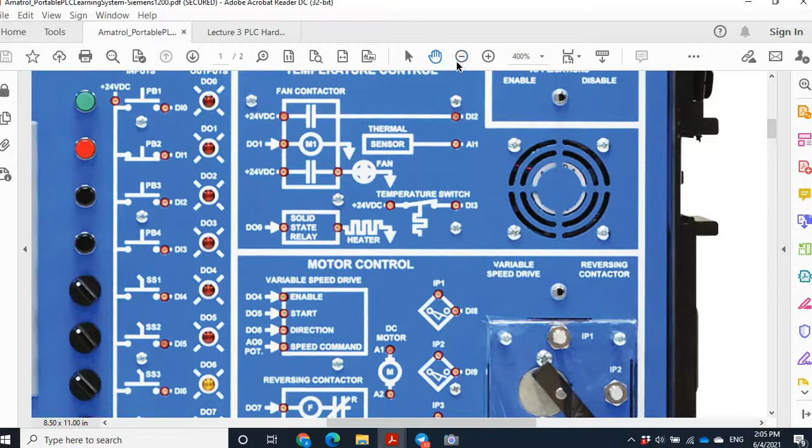Let me remind you that the trainer you have is this trainer. Let me zoom out. This is your trainer. In this trainer, you have a PLC and HMI. The PLC and HMI that you have are similar to the PLC and HMI that we have here. Let me show that to you. The same PLC and the same HMI that you have. Maybe the version is a little bit different, but the same structure.

But in your trainer, you also have some processes: a heating system, DC motor and step motor system. I don't have these. Instead, in my trainer, I have all the input and output terminals of the PLC here, and then I can wire them to the devices. So in your trainer again, let me zoom in.

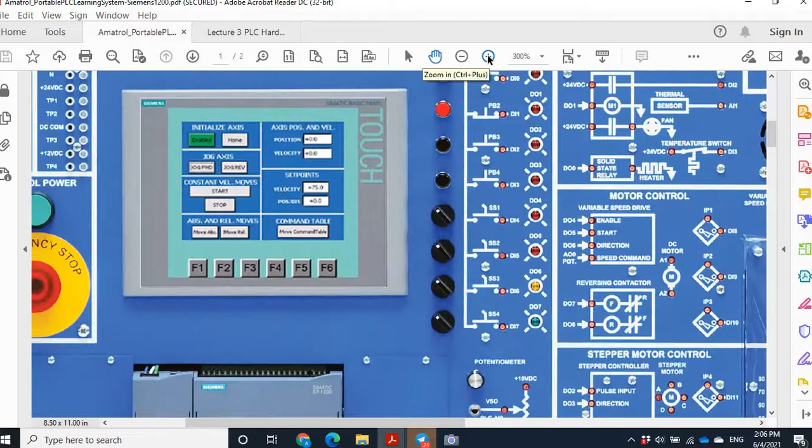Here you can see that you have the inputs, some switches, some push buttons and some toggle switches or selector switches that are connected to the inputs, and this is the wiring of that. You don't need to do wiring. And the outputs are connected to some pilot lights, red pilot lights or yellow and green pilot lights.

But in my trainer, I just have the terminals here that are wired to the PLC. This is the digital input, this is the digital output, this is for the analog inputs. And I need to wire them to the push buttons. Here I have two push buttons, green and red. I use these two similar to your push buttons, the green and red one. And also some pilot lights that I need to wire.

Also in your trainer, in this example, you're going to use the heater. Digital output number 0 is connected to the heater, so when you energize digital output number 0, when its state is 1, the heater turns on. I don't have a heater, but instead I use an electric motor.

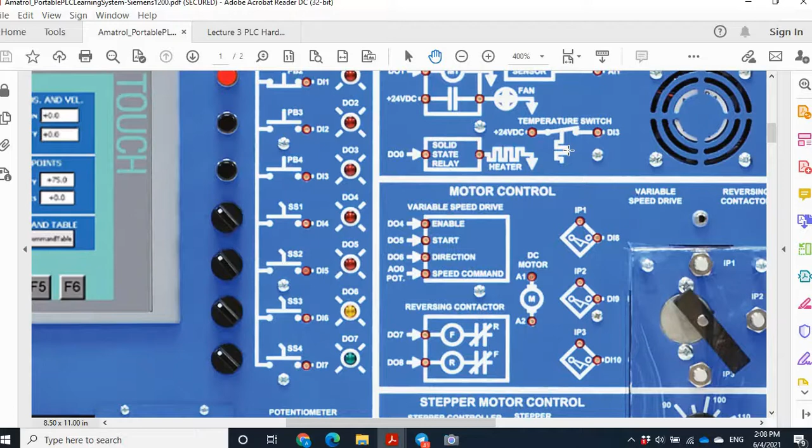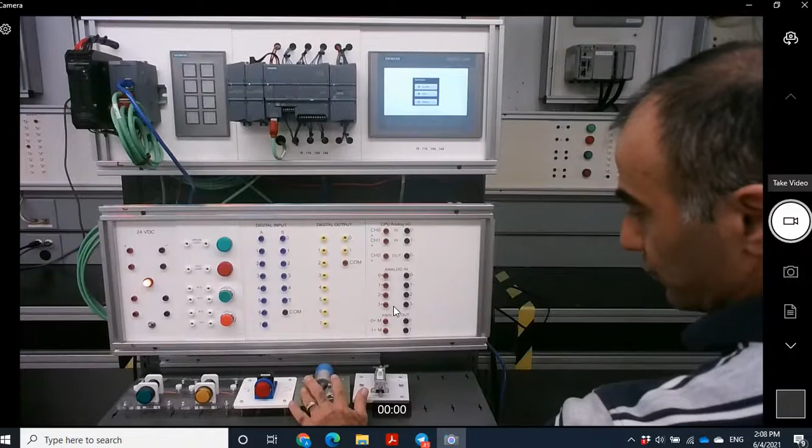You also have a temperature switch that can sense whether the temperature is more than some threshold value. This is the overheat sensor in our program. Since I don't have the heater, I use an electric motor, and instead of the overheat temperature sensor, I use just a switch. By turning it on and off, it simulates the overheat switch.

You don't need to do any wiring in your trainer, but since the wiring and the relation between the hardware and the software is an important concept in PLC programming and PLC control systems, I do the wiring in front of the camera to show you how the devices connect to the PLC here in this recorded session.

Okay, so let's first start with the program. We are going to build a program. So let's open TIA, the Totally Integrated Automation program. I have TIA on my laptop, so I just simply open it as an administrator. Depending on how TIA is installed on your computer, maybe you need to do some initial steps, or maybe it is the same. That's something you should check with your IT specialist. So let's run it as administrator.

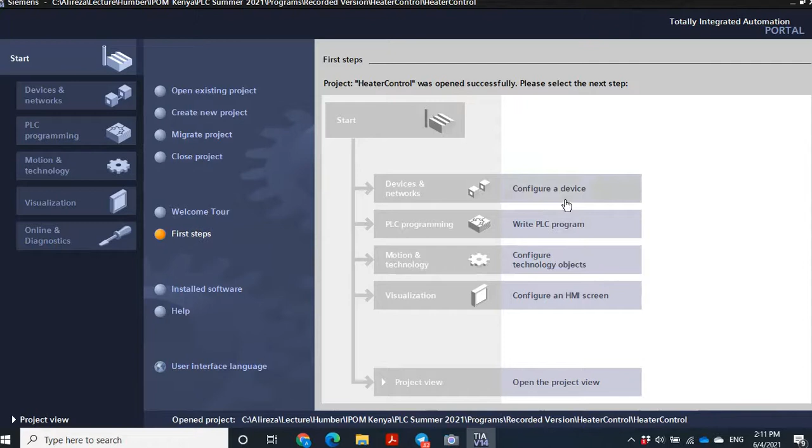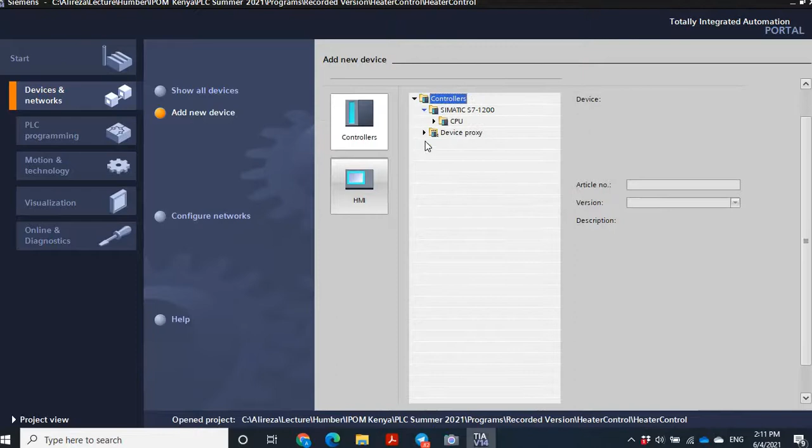Then first select the proper device. By selecting the proper device, I mean the PLC or the HMI. In this example, just the PLC. In the next example, we also add the HMI. So click on this configure a device, and then add new. Okay, controller and HMI. Select the controller under this menu, Simatic S7, and then open the CPU.

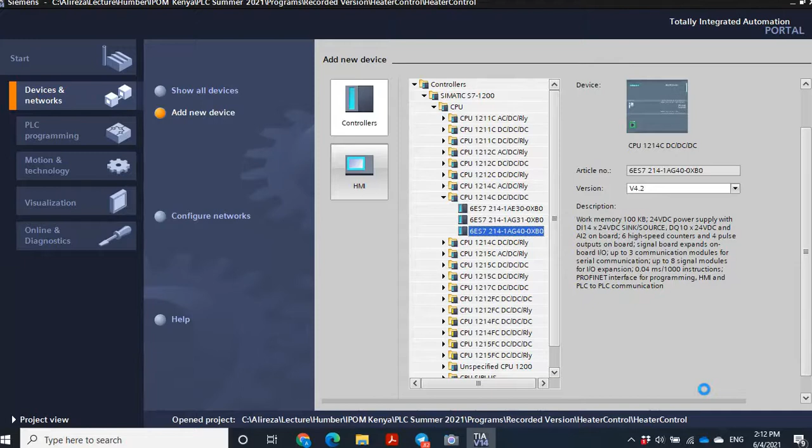The CPU that we have is this one. This type is the one that we have, and it is the same as the PLC that you have in your trainer. Okay, when you select that, leave these as default, and then add. Okay, this adds a PLC with this type to your program, but you should define that this PLC is the PLC that we have in the trainer.

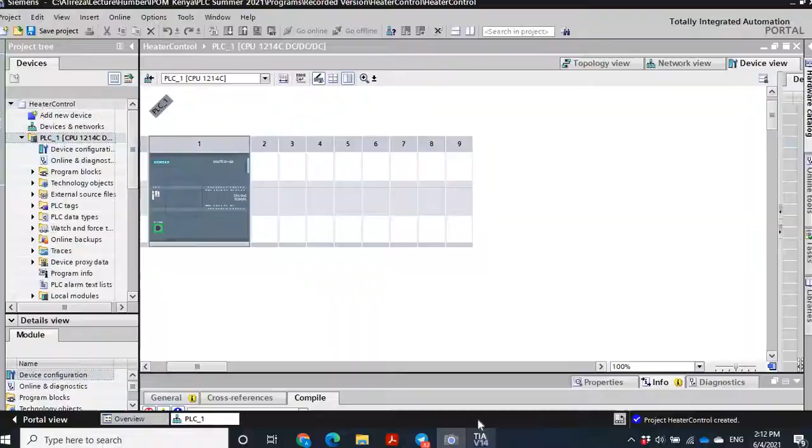So although in the software, the program, you select this type of PLC, you should say that, okay, this is the exact PLC that I'm going to connect with, because maybe there is more than one PLC here. So it's important that you define that. To do that, there are two options. One option, the simple option, is to double click on this one.

Okay, so let me double click on this one, and then drag this up. Okay, here you can see all the properties of this PLC regarding the connection, network connection, regarding the I/O and like that. We need only to set up the IP address for that. So under the General tab, find the PROFINET interface. Okay, this PROFINET interface, and under that, Ethernet address.

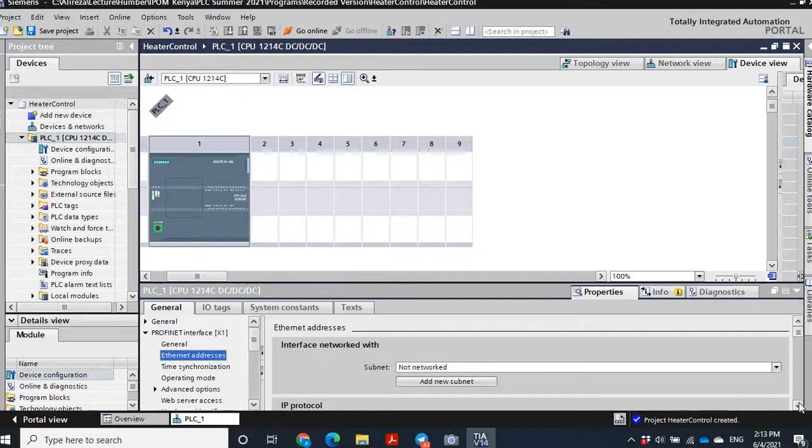And in the Ethernet address, if you go down here, you can see the IP address. There is a default IP address that is given to the PLC by the software. You can change that. The IP address for your PLC is 192.168.0.207. So let's define the same IP address in this PLC too. So this is the address for the PLC.

But if you're going to connect the PLC or any other devices to the computer, all of them should be in the same domain. It means that the first three numbers here should be exactly the same, 192.168.0. And the last one is the device number, and you should assign a different number to each device. For the PLC, the number is 207. For the HMI, we use 205, and for the PC, 200.

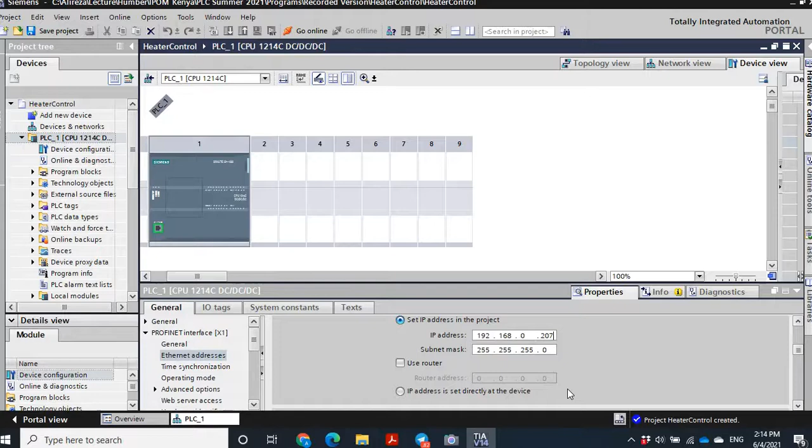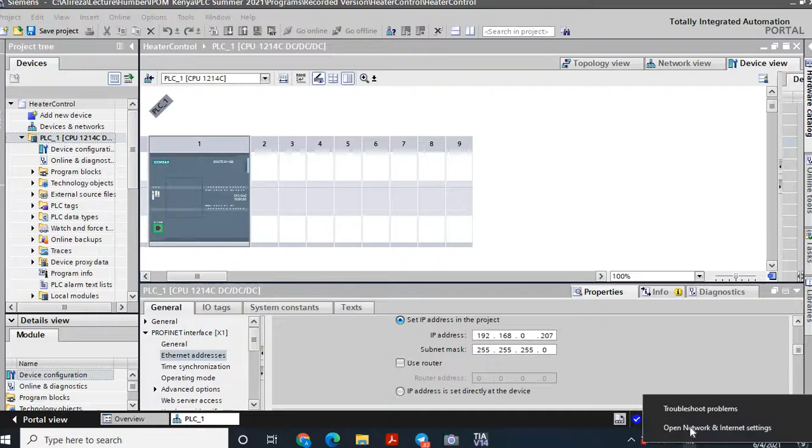So to check whether the IP address of the computer is also in the same domain and correct, you should open the network and sharing settings. So to do that, here, this is for the network. Of course, since I am connected through the wireless, it shows as wireless. Maybe in your computer it is a wired connection. So right click on that and open network and internet settings.

Here this window pops up. Under that, select Ethernet and then change adapter options. Here you see all the network adapters and devices. So the Ethernet is this one. You see Intel Ethernet connection number or something. Also there is Wi-Fi. Maybe you have some VPN or Bluetooth or like that. So this is the one that is the Ethernet.

So double click on the Ethernet. When this window pops up, select Properties and then Internet Protocol TCP/IPv4, the same as we did in the first two sessions. So select this one and then Properties and check whether the IP address is correct or not. If not, you should change it accordingly.

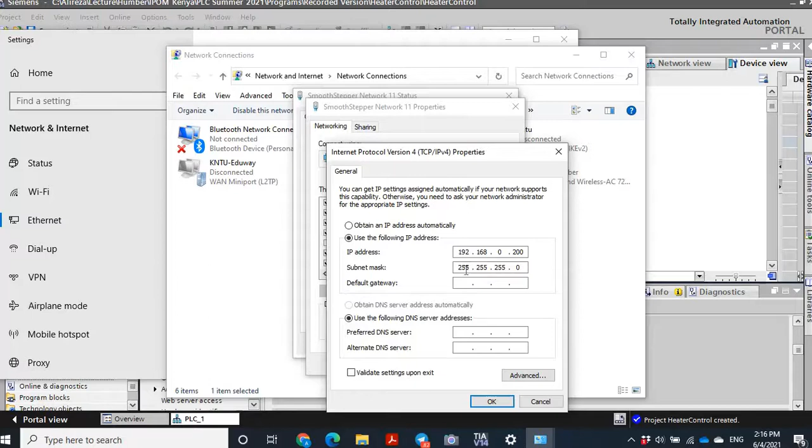So the first three numbers should be 192.168.0, the same as the PLC, and 200 for the PC. And also the subnet should be 255.255.255.0. It is correct, so just OK, and close, and close. Okay, that's correct. So the PLC and the PC are in the same domain. We should connect them. To connect them, you can go online.

There are many options. One of them is to go online, and then the software asks you; or select this accessible device; or you build the program and try to download. In all of these cases, it asks you whether to connect or not. So let me just build the program and then try to download. Over there, it asks us whether to connect to the PLC and finish the setup step for the PLC.

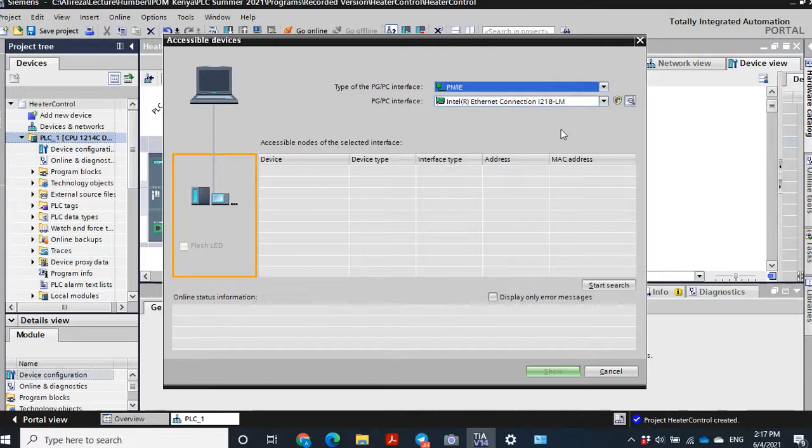So program blocks to build the program, and then on the PLC. This is PLC number 1, the one that we selected. Let me first show you the accessible PLCs once more. So here, click on these accessible PLCs to be sure that this is the PLC that we are going to connect to. Okay, the Profinet, select that. There are some other options. This is Ethernet, and then start search.

So there are 3 devices. These 3 devices in this trainer are the PLC, this HMI, and this HMI. We are not going to use this, just this PLC, and later this one. We don't use this one. So here also you can see there are 3 devices. This is the PLC one that we are going to use, this is the HMI one that we are going to use, and this is the other device that we are not going to use at all.

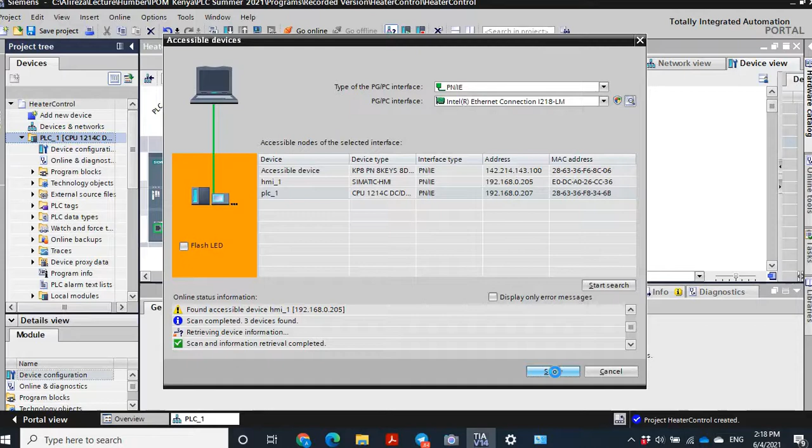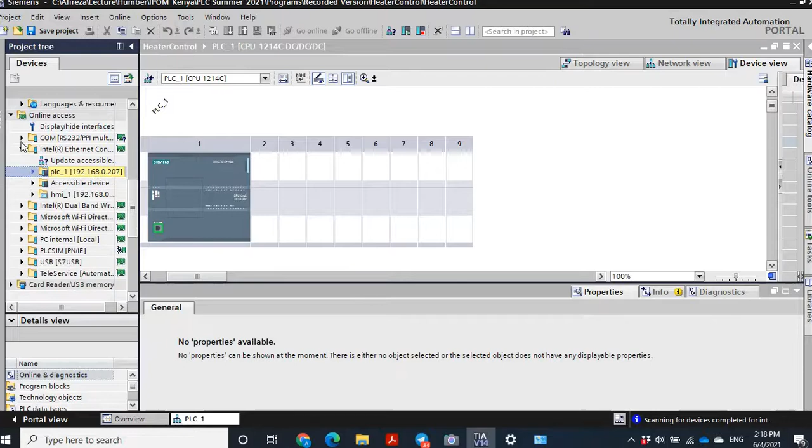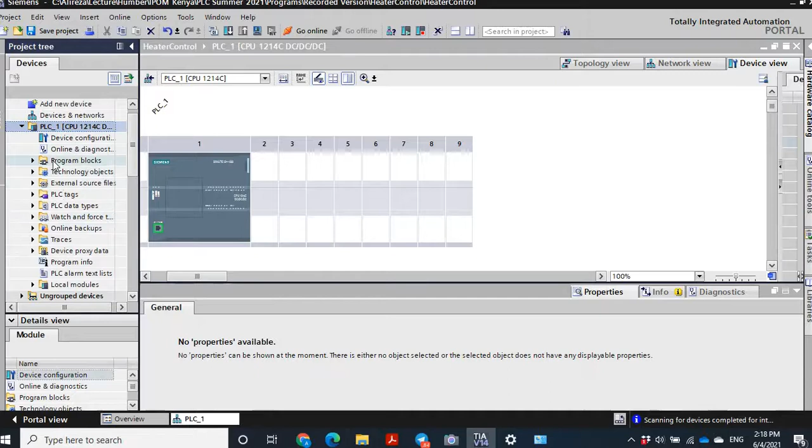So select this one, and show that. And this is PLC number 1. Okay, so it is PLC number 1, so we selected the correct PLC device. Then just drag up here, and here you see PLC number 1. Under PLC number 1, select the program blocks, expand that, and then the main OB1. Double click on that.

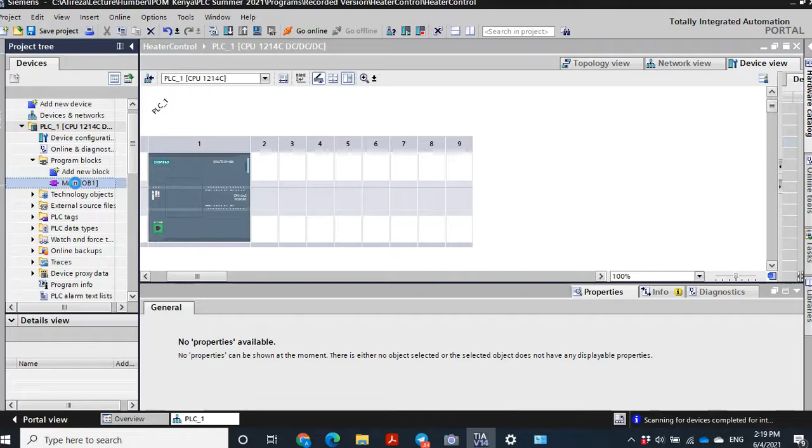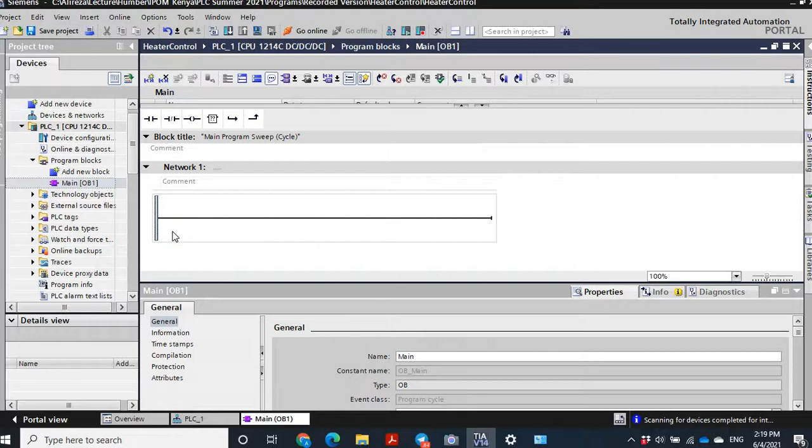When you double click on that, this is a blank file for building the program. We build our program in the main OB1. What's that? We will look at that in the last session regarding some advanced topics on the PLC. But this is the one that we use all through the programming in this lecture. Okay, so you're going to build the program here. Let me minimize this so I have more space.

And the program that you're going to build is this one. Start, stop, overheat, heater as the output. This is the heater as the self-holding, and 3 pilot lights: green, red, yellow. Try to memorize that, though of course we can go back again. Stop is 0.1, start is 0.0, overheat is 0.3, and the heater is Q0.0.

These are consistent with the switches that you have here. So you see, start is 0.0, stop, the red push button, is 0.1, the heater is Q0.0, and the overheat switch is input 3. So this is consistent with the addresses that you have in your trainer.

So let's use them. To build the program, first note that the Siemens PLC divides the program into different networks. Of course, there are more divisions, but let's just concentrate on these networks. You can build each line of this program, something that we call each rung, R-U-N-G, in one network, or you can build all of them in the same network.

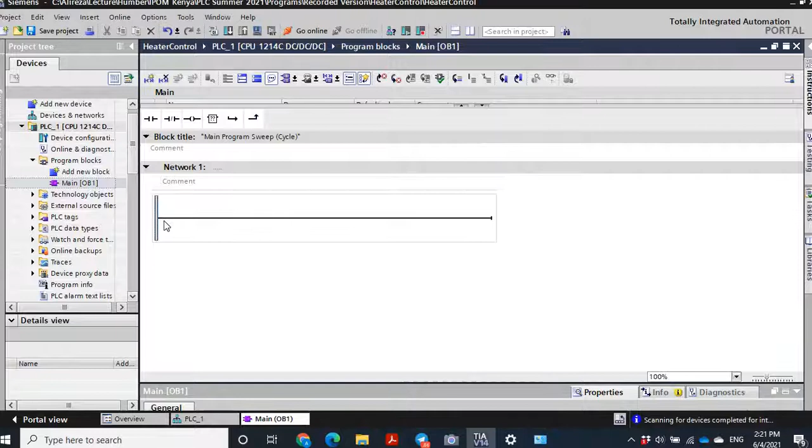There are some differences between them, but in our case, in our programs, there's not any difference. There are some differences between building all these branches or rungs in the same network or not, but it's not related to our program. So let me practice both cases.

First, we need 3 normally open contacts and 1 output. Okay, these are the normally open contacts and the output. These 3, and the output. Let me show you again how I select these. Let me delete all of them and show you again.

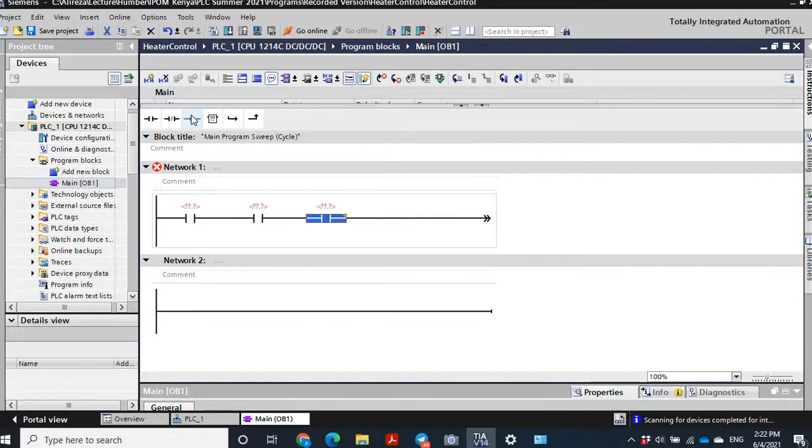Okay, I select them from here. This is the normally open. Again, 1 more, 1 more, and then an output. This is for the output, called the assignment or the output assignment. Also, I need a branch here. This is the branch I need to build this branch.

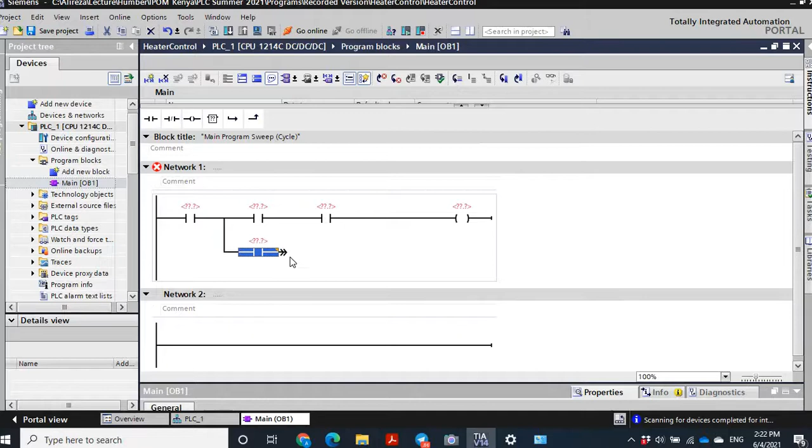Between these 2 contacts, if you click here, you see the color or the shape changes, and then using these 2 you can build a branch. By clicking on this, a branch appears here. Then we need a normally open here, and then connect that to here. Just drag that to here to connect it.

Okay, and then let's define the contact variables. This is the stop. Stop was input 0.1. Double click, and when you click on that, the software automatically assigns a tag name. This tag is very helpful, especially in large programs. The tag is unique, so you can change it.

To change it, select it, right click, and then rename tag. Select rename tag. This is supposed to be stop, so change that to stop. This is the start, so input 0.0.

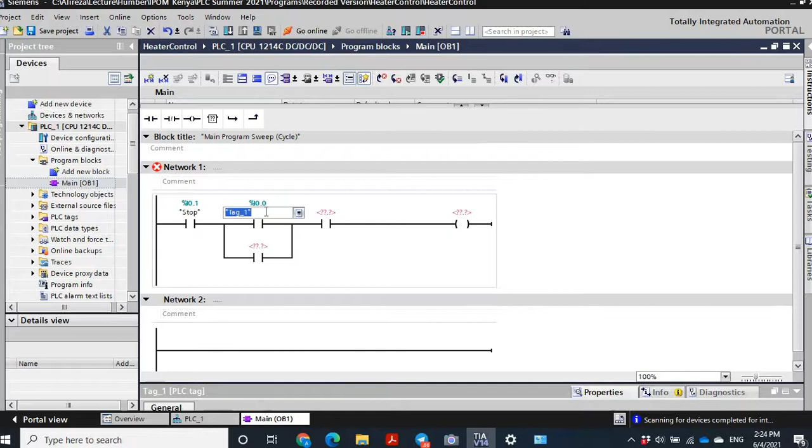Okay, and then here again select it by just clicking on it once. If you double click on it, this menu opens. This is different. We are not going to change it here. Right click, select it, then rename tag, and this should be start.

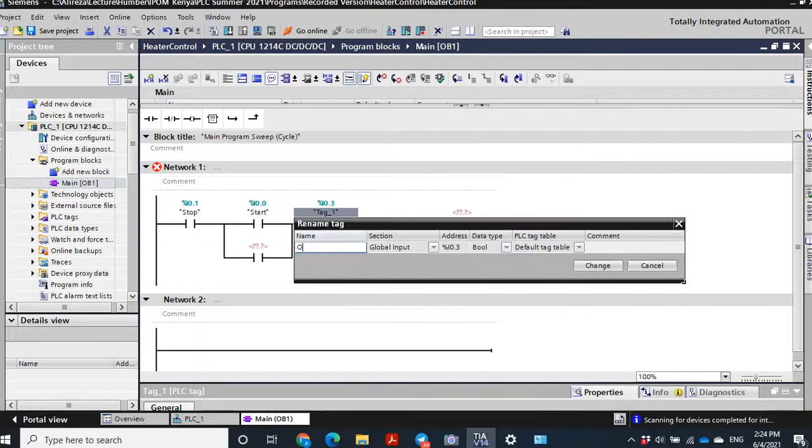And this is going to be input 0.3, and the tag for that is going to be overheat. And this is output 0.0, Q0.0, and then double click. Please take care of 0 or O. It is 0.0, and this is going to be the heater.

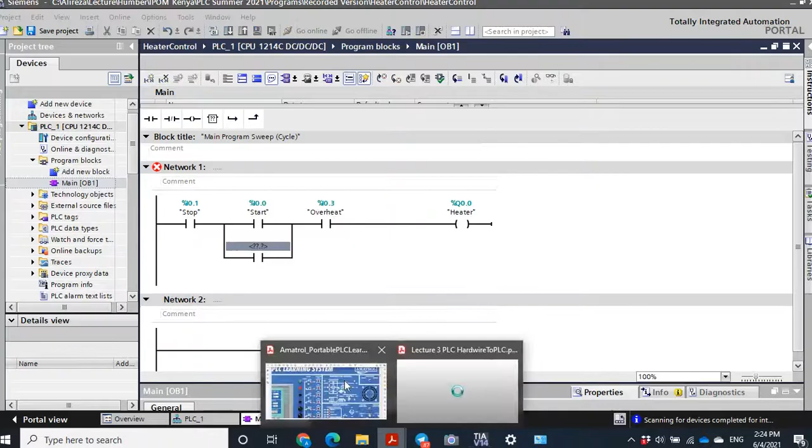Okay, here also is the self-holding. Let me show that to you again. This is the self-holding. You see it has the same address as this one. In fact, these two are the same variable. So let's use this as Q0.0. And when I click that, you see the heater automatically appears because the tag of this is heater.

Okay, to add this branch, select the left rail again, and then use this open branch. Click on that, and then we need a normally closed. You see that the software automatically adjusts the position according to the space it needs. And then we need an output.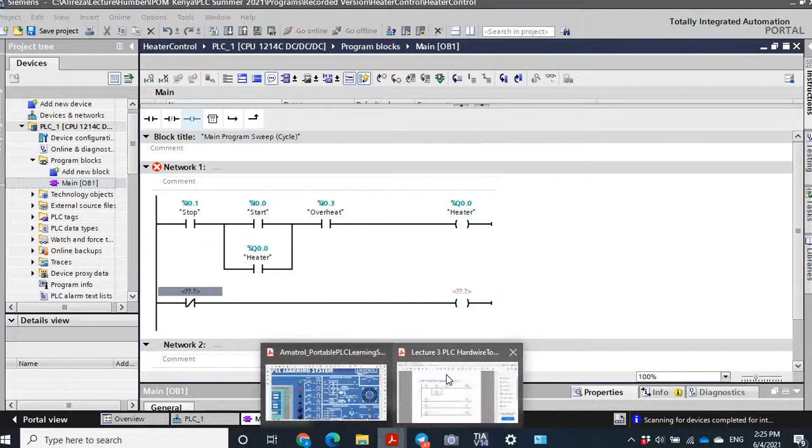This is going to be the heater, so the same address. There are two options: one is to use the address, the other is to use the tag. For this one, we used the address. We added the address there, and the tag appeared automatically. As practice, this time I use the tag, heater. Just heater, and then double click on that. You see that similarly, the address appeared automatically.

This is very helpful, especially in larger scale programs where you have hundreds or thousands of input output addresses. It's nearly impossible to memorize all the addresses, but the tags are simpler to memorize, because generally we select the tags according to something we expect. For example, oven 1 heater, or overheat of oven 1, or furnace number 1. So we choose the tags according to the application, and it's much simpler to memorize them.

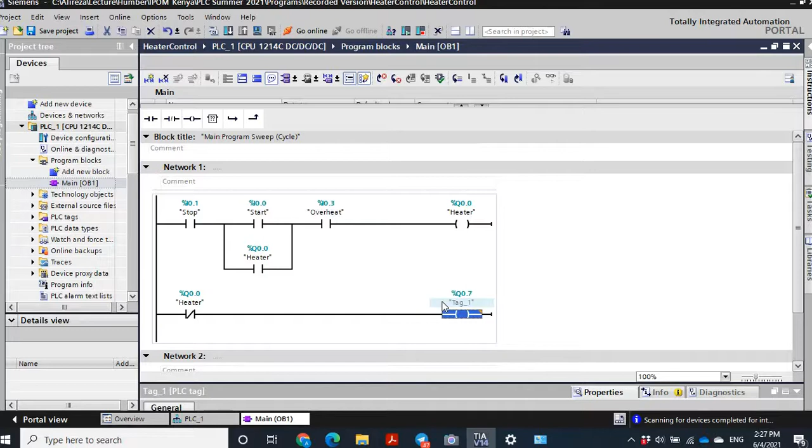Okay, this is going to be the green light, Q0.7. Why Q0.7? Because in your trainer, output number 7 is connected to the green light. So I use the same address here, and let me change the tag to green.

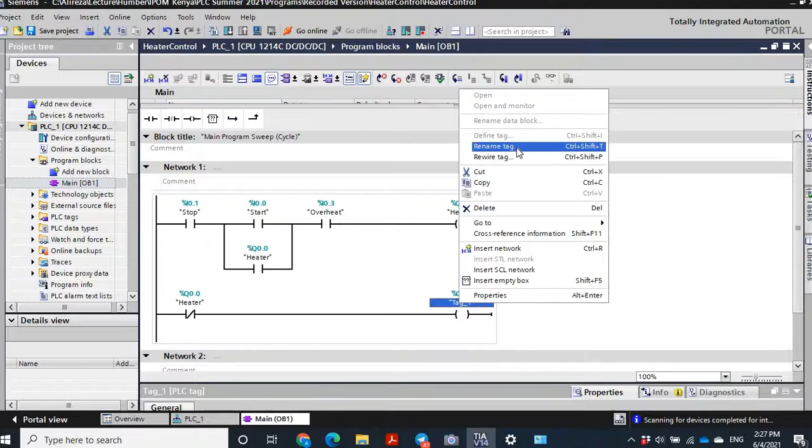Okay, and again one more branch. Click here, and then one more branch. This time normally open, and the output. This is going to be heater, and this is going to be Q0.5. It was red, so the tag is red.

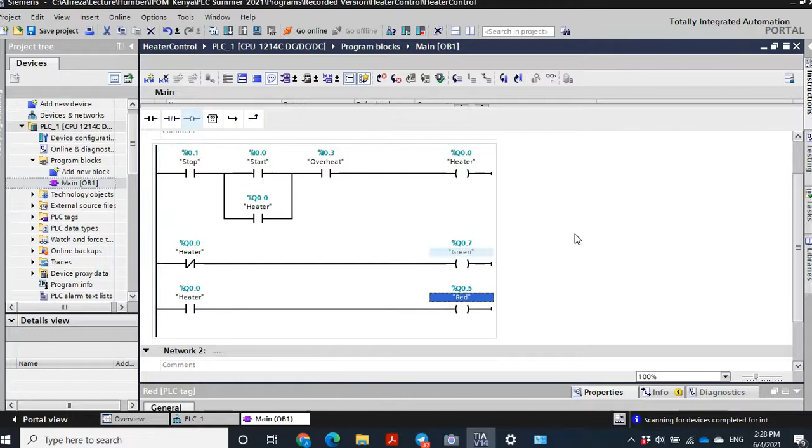Okay, and finally this overheat. In this file, the overheat is in the same network as the other branches, but I just add this in another network, as practice. So instead of adding a branch here, I skip that, go to network number 2, and add a normally closed and an output. It's the same; there's no difference from our point of view.

So this is the overheat. I don't remember the address, but I don't need to memorize it; overheat. So simply click on that. And then this should be Q0.6, and the tag is yellow. Okay.

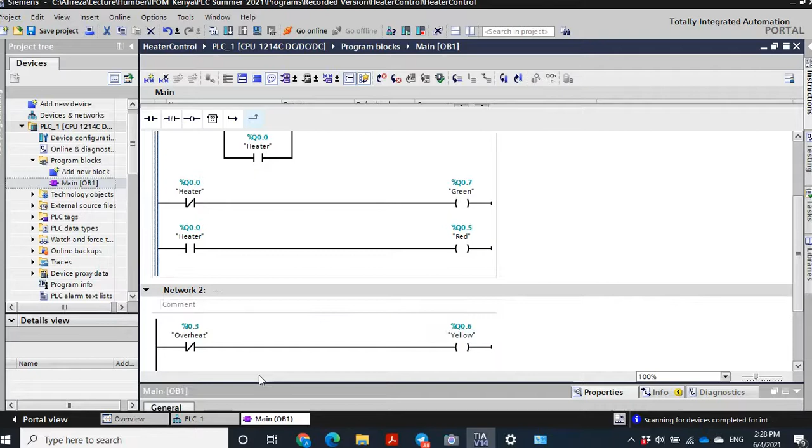So the program is ready. Check that to be sure that everything is correct regarding the input address, regarding the tag numbers, regarding the type of the contacts, whether they are normally open or normally closed.

In the Siemens PLC, there's one default network at the end without anything. Leave it as it is. You don't need to remove that, but you can also remove that simply. So let's leave it as is. So this is the program. We built this program according to what we need, and now we are going to check that.

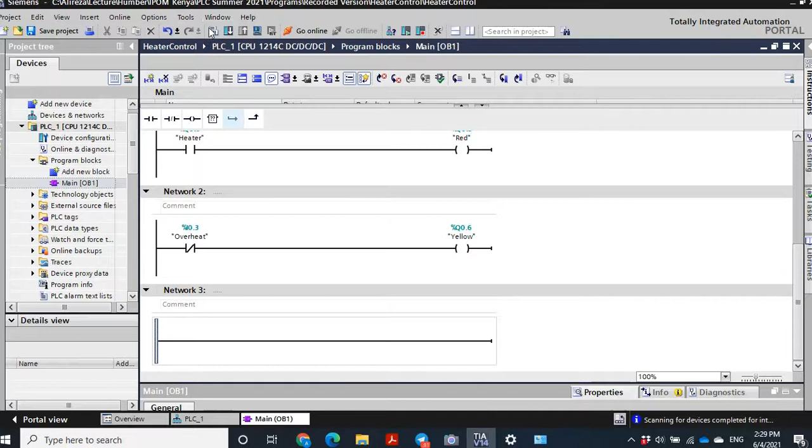First, to download that. Before downloading, it is important first to compile that. Here is the compile icon. Click on the compile, and it's doing the compile. If I drag this upward, here you see that the result is here. There's not any error on that. That's good. If there's any error, you cannot download that to the PLC.

So if there's not any error, let me compile that again to show you what will happen here. Then you can download. This is download to device. So let me download to device. Again, it asks which device, because we selected this type of device, but we have not yet connected exactly to this device.

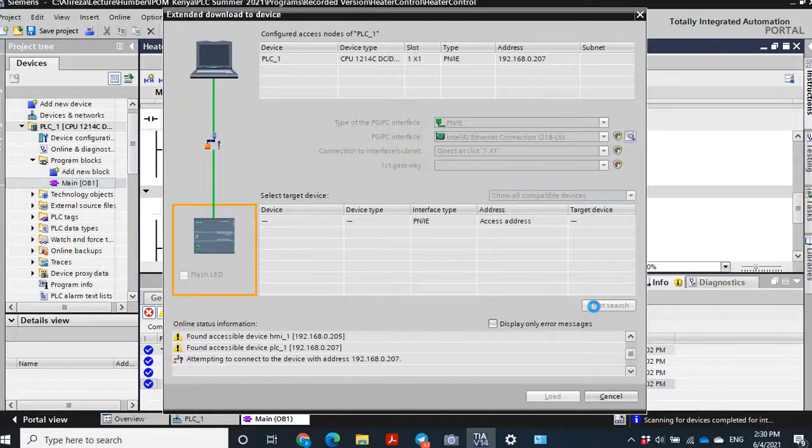There are three options here. I told you in the previous session: same address, compatible, and accessible. Let's use this compatible device. Compatible device means that it looks for any device that has this type of CPU. So start search. Good. It found it, and then I can select to load that.

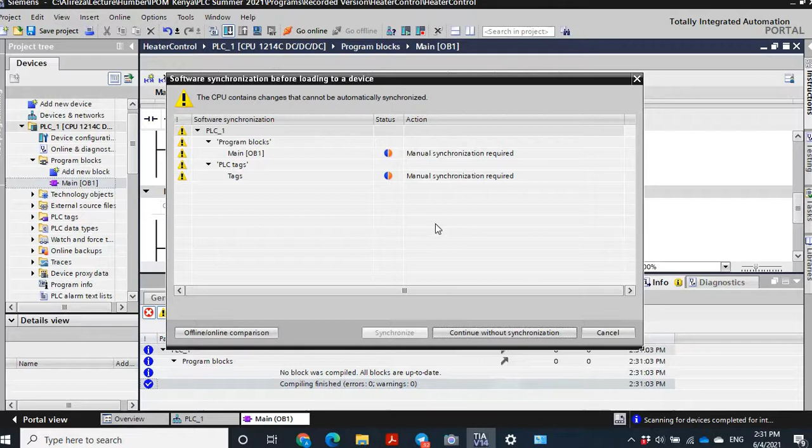Here it might ask you this, depending on your program. Sometimes it asks, for example, regarding the synchronization. Just continue without synchronization. And here it asks, this is important: we cannot change the program of the PLC when it is in the run mode. It should be in the stop mode.

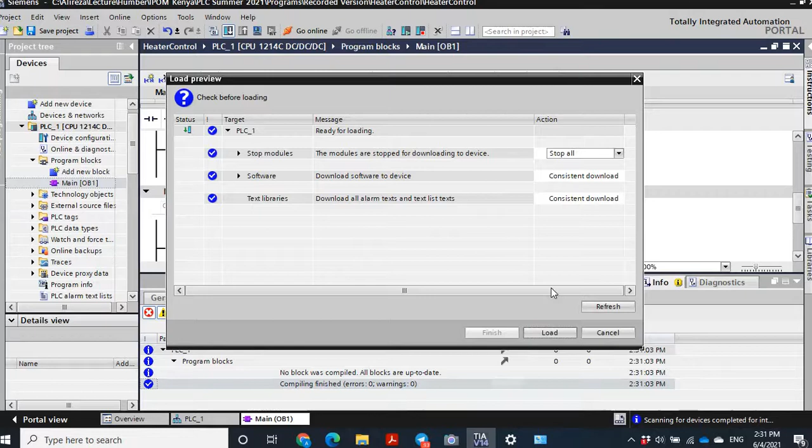So when you try to load the program, if the PLC is in the run mode, it asks you whether you want to stop the PLC and then download the program or not. If you don't stop that, you cannot load that. You should select the stop, so the PLC does not work anymore. It's just in stop mode, and then we can load the program on that.

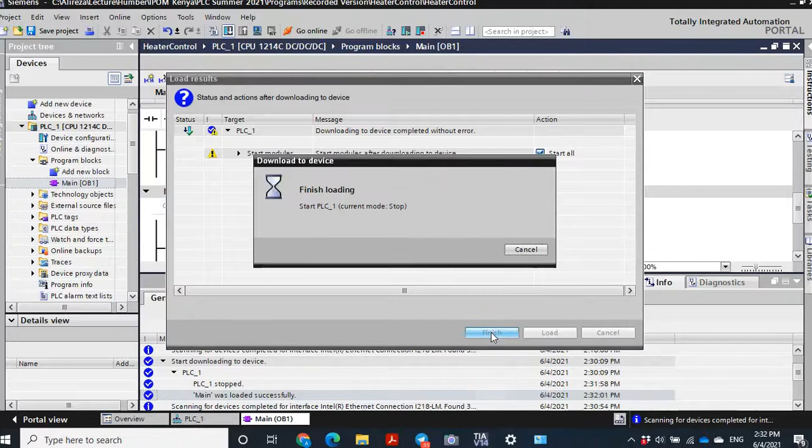Then after the download, it again asks whether you want to start that, set it in the run mode. If you click finish when this is selected, it starts the program. If not, you can simply say no, I just want to download the program, but I don't want the PLC to start to run it. Just save that in the PLC and leave that for later. But let me just start that. So not only downloaded, but the program is now running on the PLC.

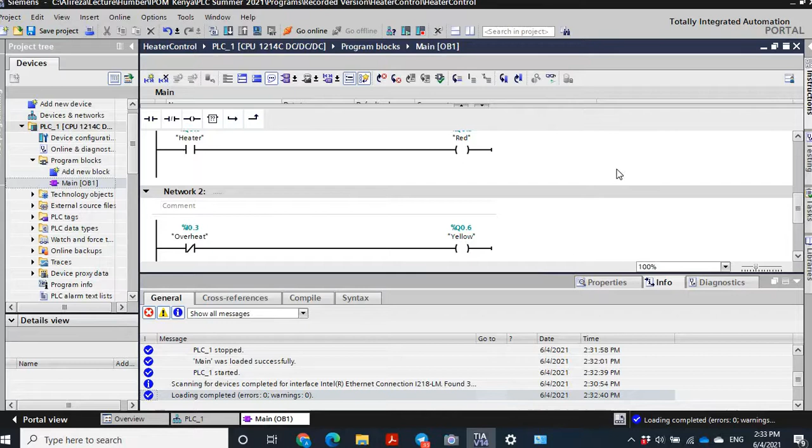When you have the program in the PLC, if you have a computer connected to the PLC, you can see the state of the inputs and outputs and all of the variables in your PC too, because the PLC does not have any monitor. How to do that? Let me again drag it down. There's one icon here. It's called monitoring on/off.

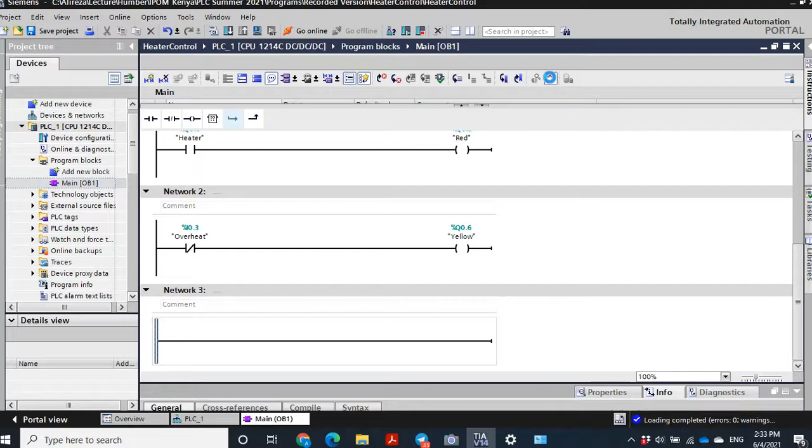If you click on this, let me click on that. Then I'm monitoring the state of the variables. If a variable or a connection is green, it means that the logical state of that is 1. And if it is dashed blue, it means that the state is 0. So right now you see that the stop input is 0 because there's not anything connected to that, so it is 0 and it is blue.

And the start and the overheat, all of them are 0. And the heater is off, so it is blue. Since the heater, Q0.0, is 0, and here we use the NOT of that. This is a normally closed contact, and normally closed, you studied, is NOT. So the state of the variable is 0, but the state of the contact is 1.

So you see that since this is green, or let's say this is the supply, true, and since this is green, it means that the logic 1 can pass that, and so the green here shows that the Q0.7 is 1. The logic of that is 1, and if you look at the PLC, of course it's a little bit far, but the light for the output 07 is on. It means that the output of that is 1.

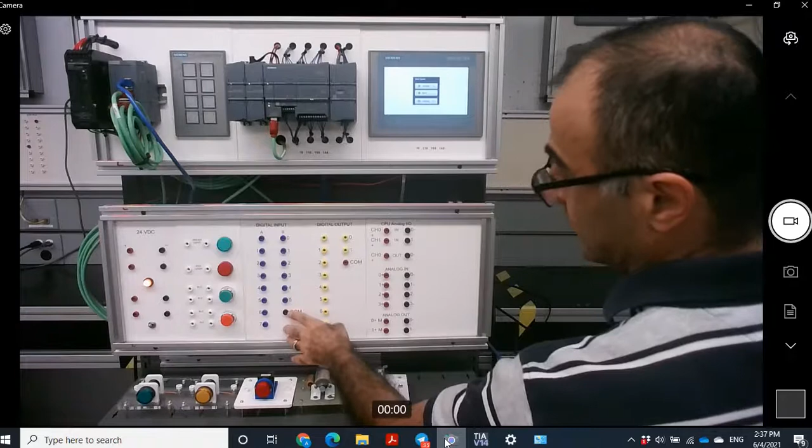For this PLC, as I mentioned, you don't need to do this wiring in your trainer. Everything has already been wired. But for this PLC, the input COM terminal must be grounded. Here in this trainer, it shows as a black terminal, and for the digital output, the COM should be connected to the positive or 24 volt.

So first, let me connect this one to the ground. This is to the ground. Okay, this is the one I need, and this COM to the 24 volt. This is something that we need. Okay. Let me emphasize that these are different from the wiring that you have here.

For the wiring that we have here, we have start and stop, green and red, green for the start and red for the stop. In your trainer, green is a normally open and red is a normally closed. In my desk, the green has both normally open and normally closed terminals, and the red also has both. I use the same terminals as you have in your trainer. So I use only the normally open for the green and only the normally closed for the red. So it's consistent with your trainer.

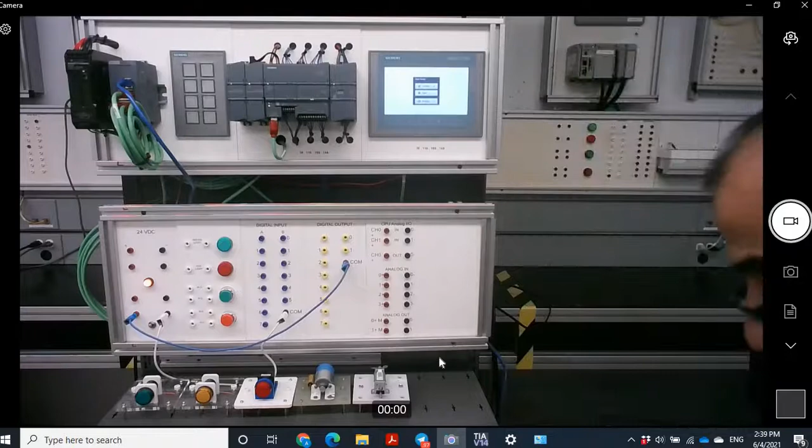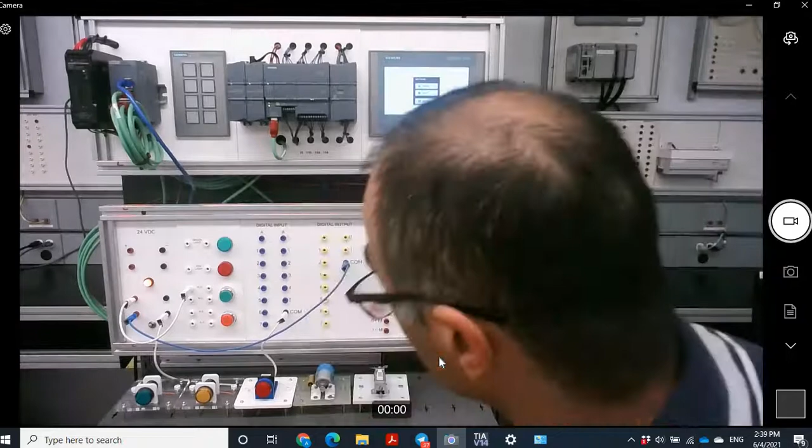So first, from 24 volt to the normally open of the green, the start, and the start input was input number 0. Okay, so this connection from the 24 volt to the normally open for the start and from the normally open to the input is in fact these wires here, from the 24 volt to the start and from the start to the input. It is this wire. Similarly for others.

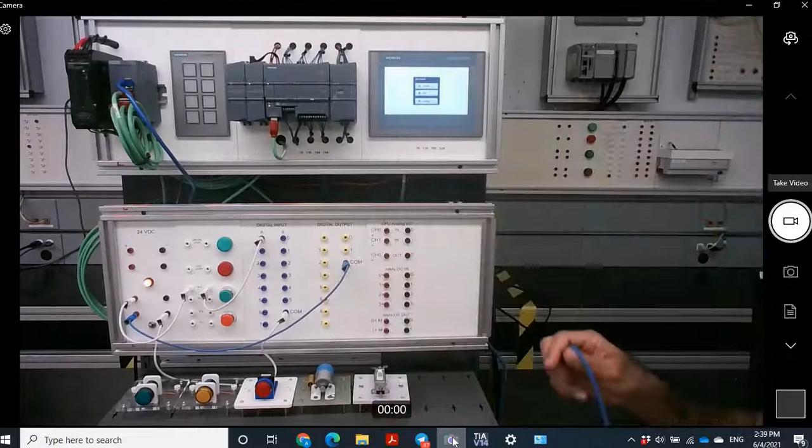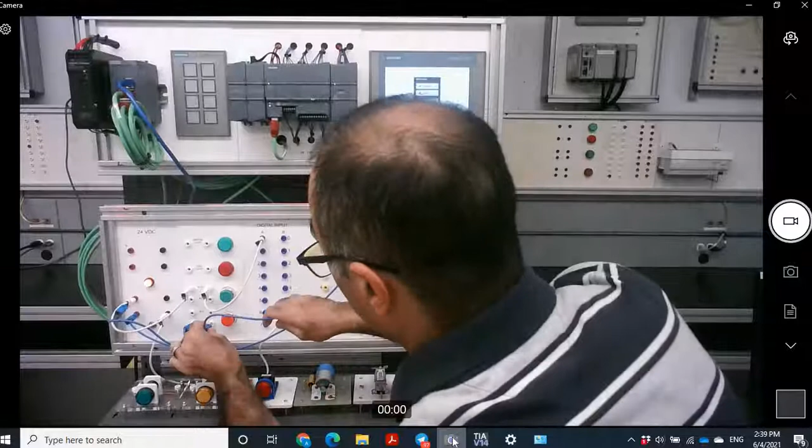So let me do for others also here, from 24 volt again to the normally closed, because the red, the stop, is going to be normally closed, and from the normally closed to the input 1.

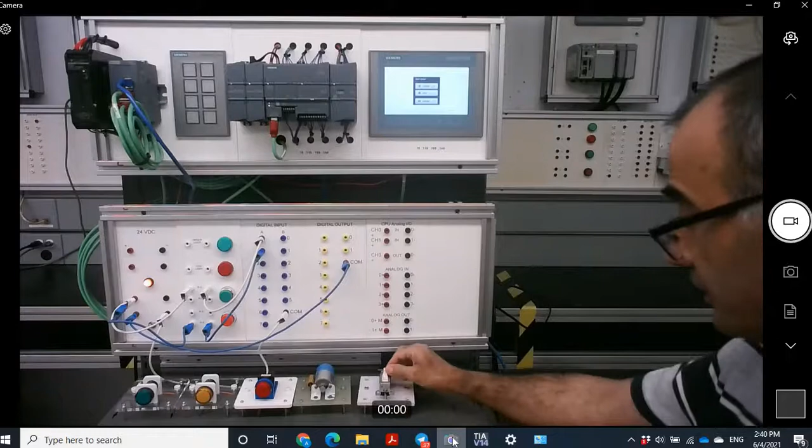I don't have the overheat switch, but instead I use this simple selector switch. Again, from 24 volt to this switch, and from this switch to input 3. Input 3 was the input that I had for overheat. So this is for the overheat. These are the inputs. For the outputs, I have an electric motor instead of the heater.

So I use this one from output 0. Wire this one from output 0, Q0.0. Here please notice you see 0 here and 1 here. This is Q0.0, 0.1, 0.2, 0.3, 0.7, and this is Q1.0, 1.1. It has 10 digital outputs. 8 of them are Q0.0 to Q0.7, and the other 2 are Q1.0 and Q1.1.

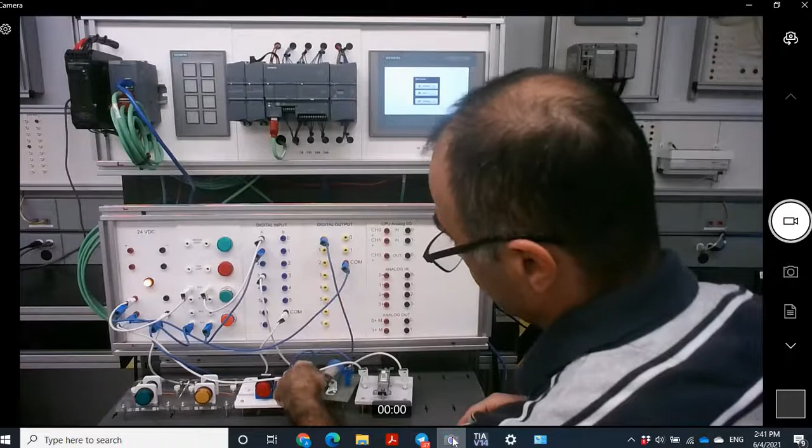For the input also it has input 0.0 to input 0.7, input 1.0 to input 1.5. Okay, so 0.0 is this one. So let me connect that to the motor, and the other terminal of the motor to the ground. This is the ground. So this connection from 0.0 to the motor and from here to the ground is in fact this connection: from the output to the motor, or heater for your case, and from the heater to the ground.

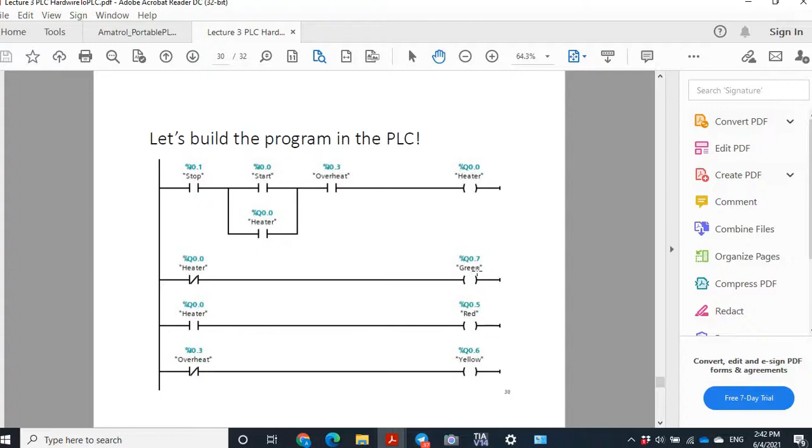And I need also the lights. Let me see the addresses. Red is 0.5, green is 0.7, and yellow is 0.6. So from output 0.7 to green. This is the green. Press to the back. To the 7. And the other terminal of that goes to ground.

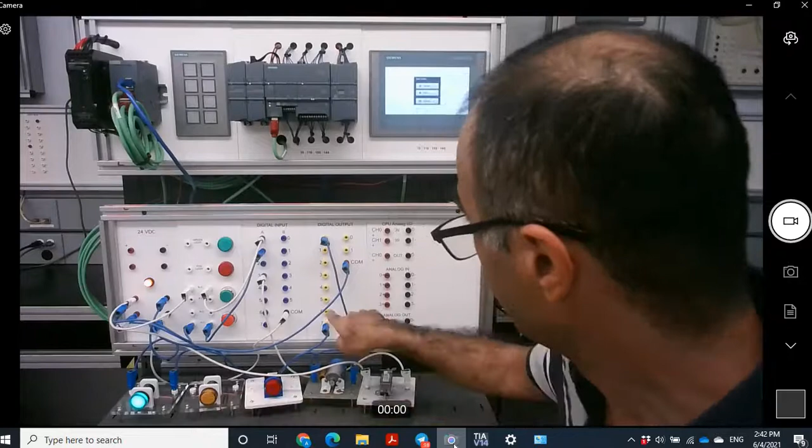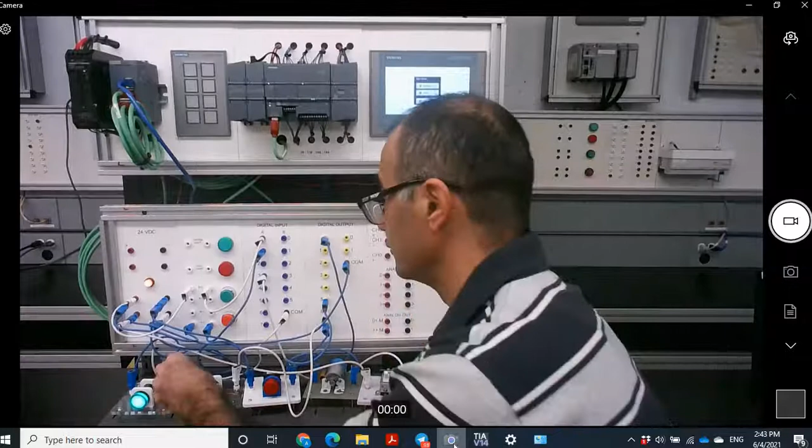And also 5 is for the red. So 5 to the red, and the other terminal goes to ground. And finally, for the yellow, it is from 6. So from output 6 to the yellow light, and from the yellow light to the ground. Okay. So the wiring is complete. Hopefully everything is fine; let's check.

To check that, let's see the program. According to the program, Q0.0 must be off. So the heater is off, that's correct. Q0.7, the green, must be on, and you see that it is on. The red light should be off. Yeah, it is off. And the overheat light right now is on. Why is this on? Because the overheat input itself is off. It means that there's an overheat, since of course there's no switch connected.

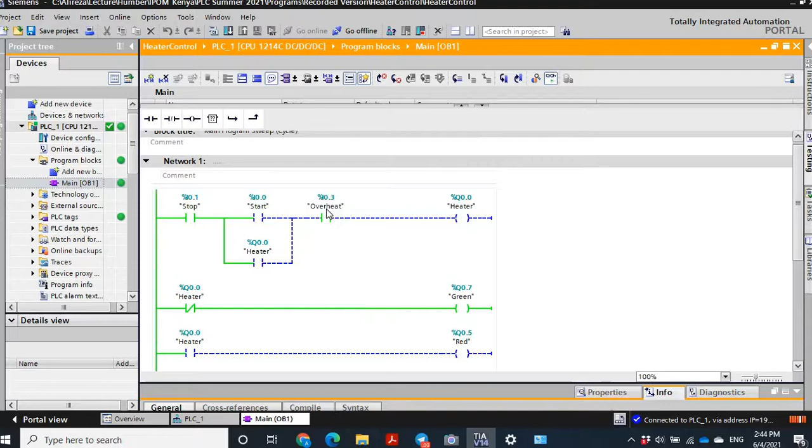So let me just switch it on. When it is in the on position, when it is closed, here you see that it is green. When this is green, it means that this contact is closed, or the logic of this contact is 1, because the logic of its input is 1. It is on, you see? Let me show you here. There's an on here. When it is in the upward position, it is on.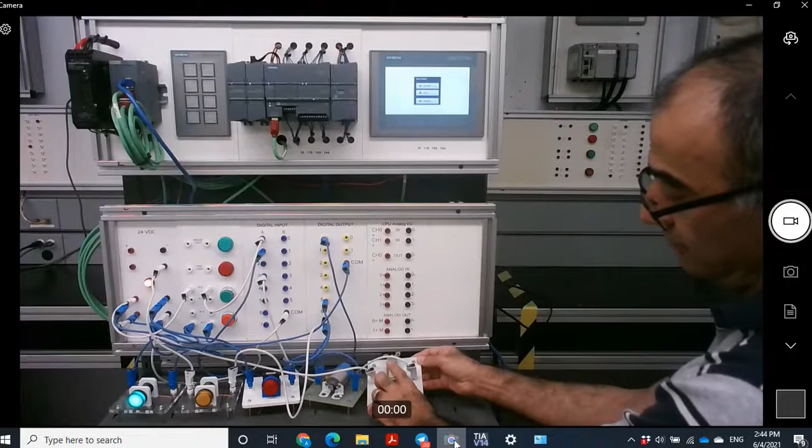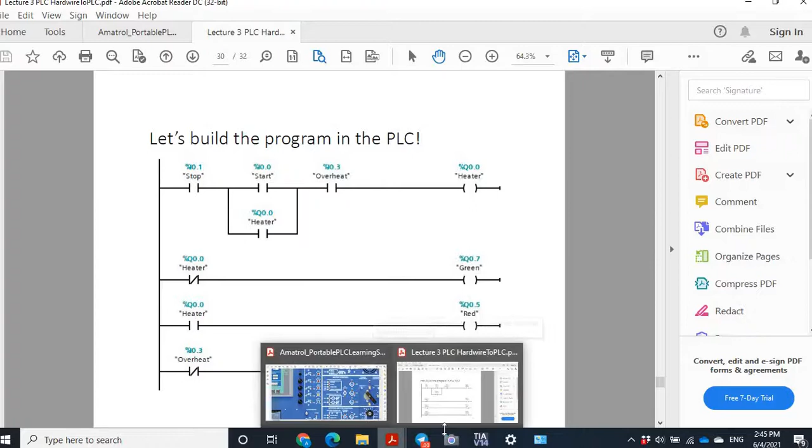When it is on, the switch is closed, so the 24 volt appears in the input, and when 24 volt appears in the input, the logic of this is 1. When the logic of input 0.3 is 1, the logic of this contact is 1. And now the only thing I need to turn on the heater is to push the start, because this is on and connected. This is off, so it is not connected; you see that it is blue. This is on, but because there's no logic before it, the logic before is 0 and after is also 0.

If I push the start, this becomes 1, and as a result this line will be connected. Let's look at that. I expect that when I push the start, the logic reaches this point, and this is closed, so the logic continues to the heater, the output turns on, and the motor turns on. So let me push this and see what happens. You see that? When I push it, this closes, so all of them are closed, and so the heater is on. And when the heater is on, this also closes.

This is the contact, the state of which is similar to this one. So even when I release the start push button, you see that this turns off. Okay, so the logic cannot reach the heater through this branch, but it continues to reach the heater through the self holding. This is the self holding, and so the heater is on.

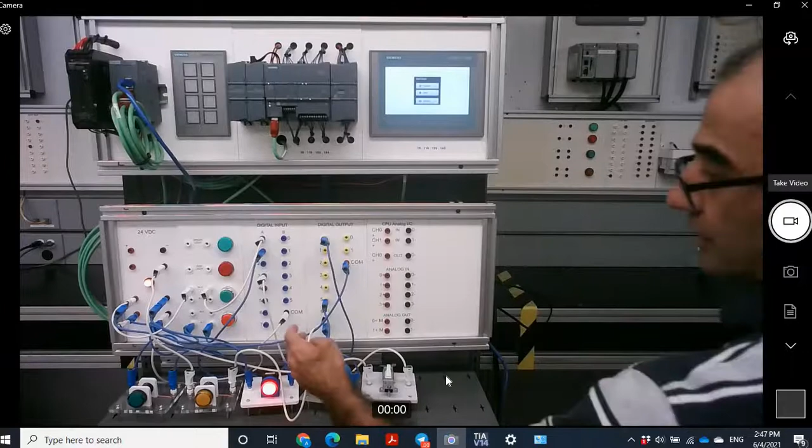So let me start and stop that. Then I push this stop. You see, the motor turns off, the red light turns off, the green light turns on. Again, start that, the motor turns on, the red light turns on. That indicates that the motor is on, and the green shows that it is off. Okay. What about the overheat?

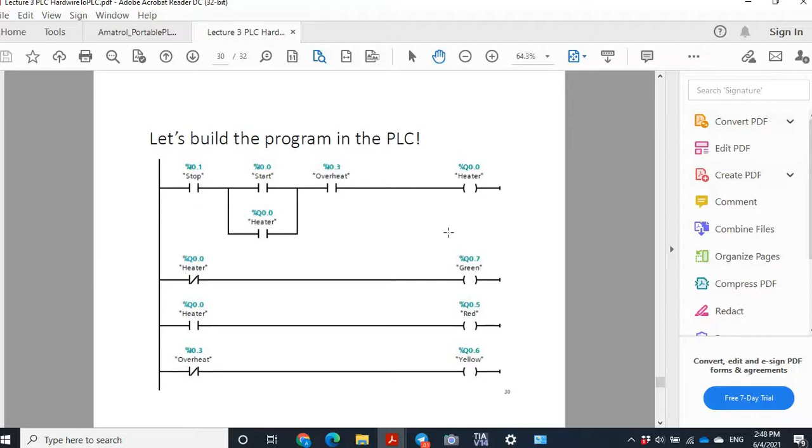Overheat, in fact, happens when the temperature is more than some threshold value. In your system, you have the overheat switch, so automatically it turns on. In this trainer, I don't have overheat, so instead I use this switch. Right now, the switch is on, so the switch is closed, and so we can turn on the heater. If an overheat happens, the switch turns off.

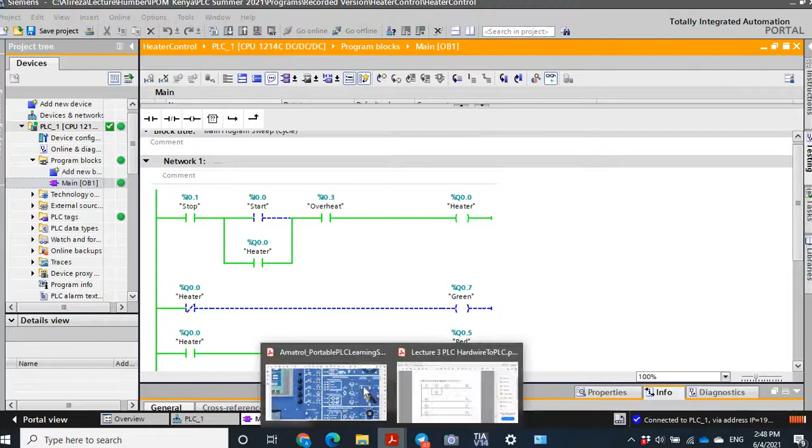This is a normally closed switch. So in the normal case, when there's not any overheat, this is closed, and this is something that you see in the program also. It is closed. Okay? But when there's an overheat, this opens. When this opens, we expect that the heater cannot turn on. Okay, let's see.

Let me open that as if there's an overheat. You see, the motor turns off. Here the motor turns off. And not only does this green light show that the motor is off, but also this yellow light shows that it is because of overheat. So the motor turns off not because somebody pushed the stop. It's because an overheat happens. So it is different from that.

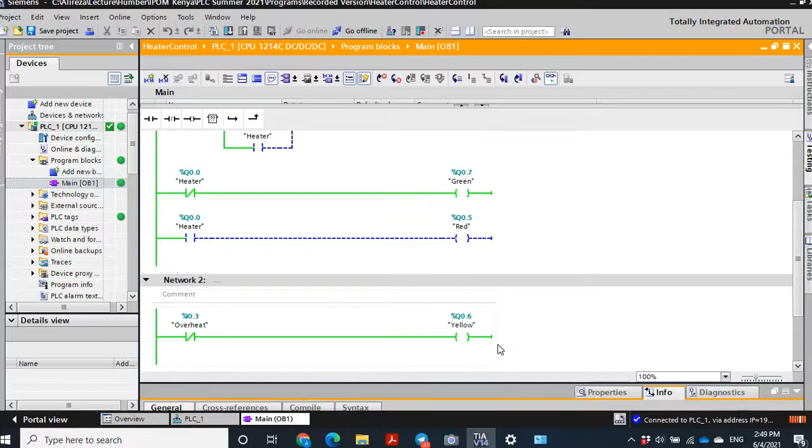Let me do the experiment again. So let's assume that there's not any overheat. We can start. We can stop. You see, it is stopped, but there's not any overheat. It just shows simple start and stop. But if there's any overheat, not only does the motor stop and this light turn on, but also this overheat light turns on. This is an indicator to the operators that there's an overheat. What to do is the next step. It depends on the application.

Okay, that's all. This is a first program. There were many basic issues to be handled. The program is not very complex, but there were many issues regarding the wiring, how the logic works, and how to monitor the programs. Now we are familiar, and we are going to use this concept for more complex programs. In the next step, I'm going to add the HMI. In this experiment, we didn't use the HMI. We only used the PLC and communicated with the PLC using these networks.

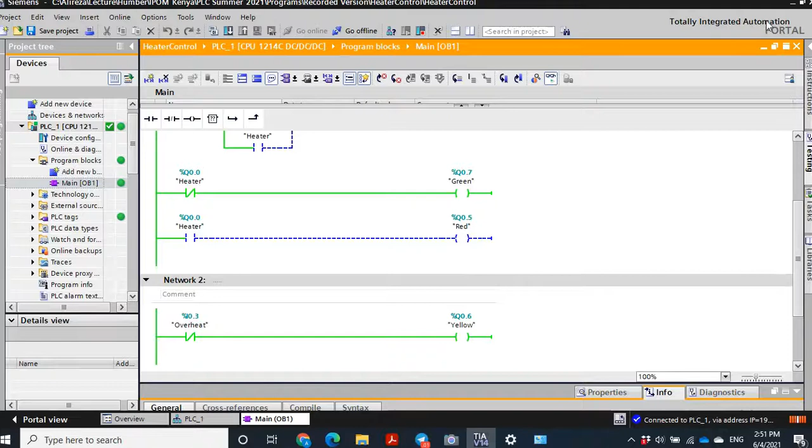Please notice that operators generally don't use the program, unless there is some special reason to look at it, especially for diagnosis and maintenance. But in normal operation in the industry, operators just work with these switches and lights. They look at the lights and understand, okay, there's an overheat, or it is in the stop mode. But instead of using these lights and switches, we can use the HMI.

We can turn the motor on and off on the HMI, or indicate the state of the motor or the heater on the HMI. This is the next step that I'll show you. I stop this recording session at this moment, and in the next recorded session, I will show you how to build the same control system, but instead of having these switches, just use the HMI and the PLC.